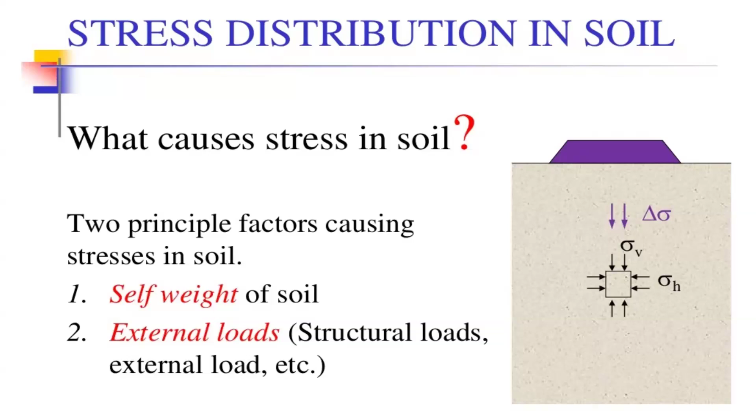Moving on, now let's think about the stresses due to self weight. When we think about a soil particle, there is a certain soil mass above this soil particle. Because of the soil mass above the soil particle, certain stresses can happen.

So the vertical geostatic stress at any depth - the geostatic stress means the weight of the soil above this depth. As a result, certain weight will be acting on this soil particle. So we call that geostatic stress. How do we calculate that?

That geostatic stress can be calculated by this simple formula: sigma is equal to gamma Z. Z is the depth from the ground level to the point we are considering, and gamma is the unit weight of soil. If you multiply the unit weight by the depth, you can calculate the vertical geostatic stress due to the self weight of the soil mass.

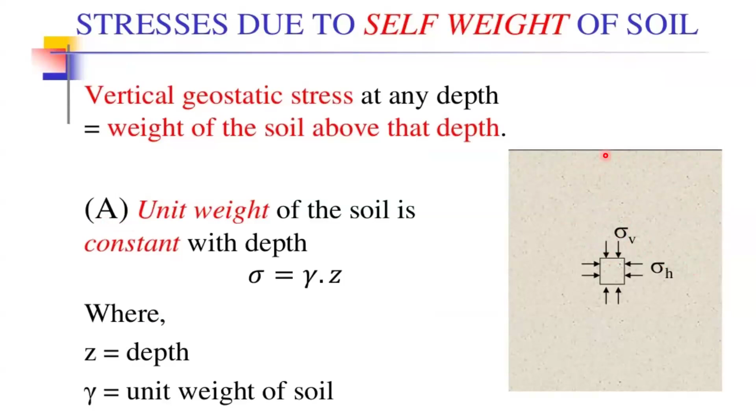In case number A, when we calculate sigma V, the vertical stress due to self weight, if the soil layer is not changing, it is very easy. You have a unique soil above the soil particle. The gamma will not change from here to here, so we multiply gamma into this depth to get the stress due to self weight. That is case number A.

In case number B, the problem is the soil properties vary from here to here. So we divide this soil into a very small depth. The depth of that small soil layer will be dz, right?

Within that dz, a very small depth, the soil properties will not be changed. So by assuming the soil properties don't change within that dz, gamma into dz is the weight of that small layer. You have to add each and every layer from here to here, that's why integration happens, from 0 to z, meaning 0 is here and z is here. You add each gamma dz value from here to here.

Case number C is the stratified soil, meaning layered soil. There we have certain layers, and within each layer the soil properties will not change.

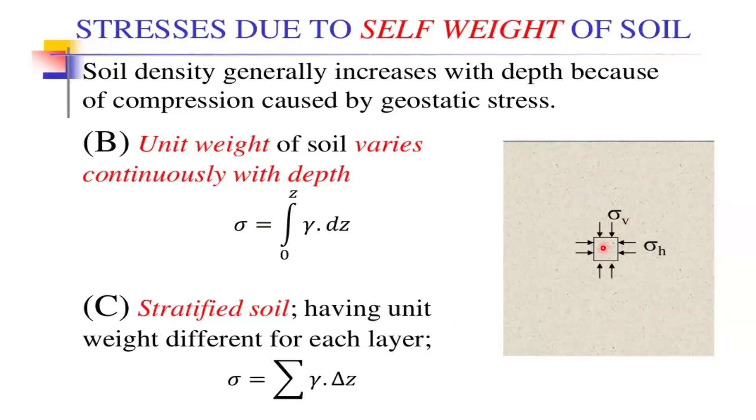Now we have a stratified soil layer. The point of interest is somewhere here at point X. This is the ground level. From this ground level, the first layer is sand and the second layer is clay, and the groundwater table will be there. The gamma value will be different here because it is dry sand, and here we have wet, saturated sand because the groundwater table is here. As a result the gamma values will be different here and here.

You have been given certain values: sand gamma D is 13.1 kilonewtons per cubic meter, sand gamma is 18 kilonewtons per cubic meter, and we have a clay layer here with clay gamma of 19.8 kilonewtons per cubic meter. So now there is a certain layered soil above this point X.

If somebody asks you to calculate the stress due to these soil layers, how do you calculate it? This is case number C, different soil layers are available. Here we have a dry sand layer, here a saturated sand layer, here a saturated clay layer. If you know the gamma values of each of these layers, you multiply gamma into depth so you can evaluate the stress coming to this position. Can you do it?

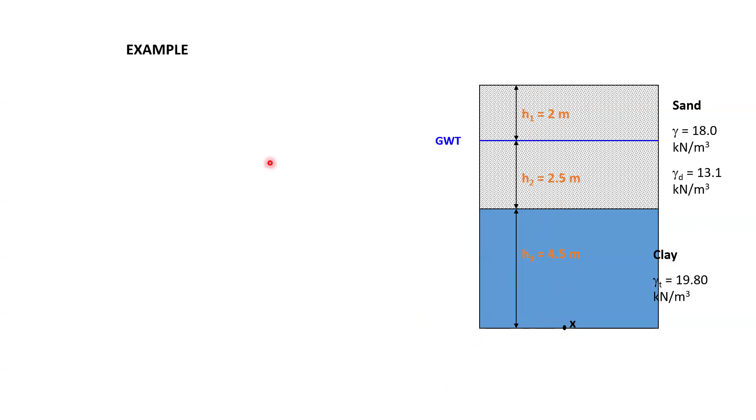And the clay, we have 19.8 into 4.5, so that you can get the stress over there. If you add all together, you get the final stress at point X. So this is the total stress: 13.1 into 2, 18 into 2.5, 19.8 into 4.5. So the total stress at this point is 160.3. That is the total stress.

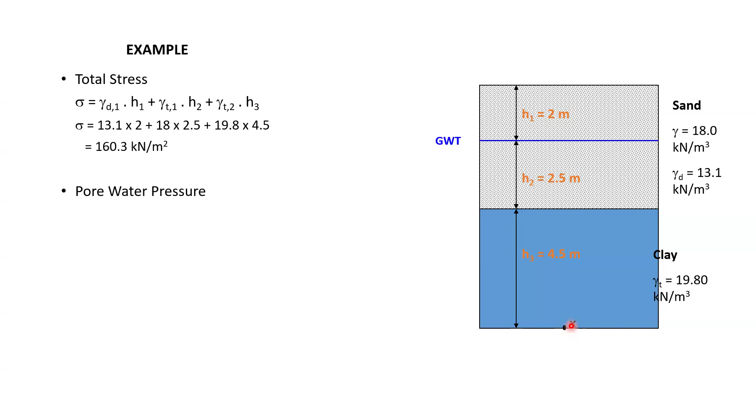Another thing is you cannot forget the pore water pressure, right? So the pore water pressure here, U, is equal to gamma W times H2 plus H3, because the water table will be here, so the water itself has certain additional stress up to here. So the height is 2.5 plus 4.5, altogether 7 meters, into 9.81. Instead of 9.81, I used 10 for my easiness. So U will be 70 kilonewtons per square meter.

Now you know the total stress, you know the pore water pressure. If you want to calculate the stress due to the soil, what would be the answer? The effective stress will be 90.3 kilonewtons per square meter. So some questions refer to total stress, some refer to effective stress, so you have to select what stress is to be used. So the self weight at this point due to the soil will be 90.3. Due to soil 90.3, the pore water will be 70, the total stress will be 160.3.

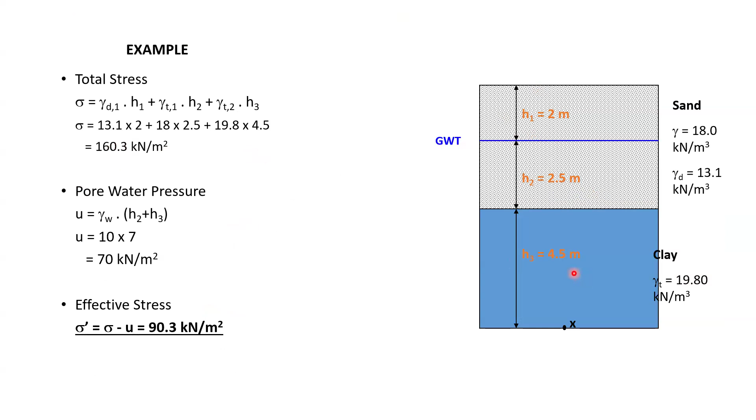Right, Ranmini, okay, now moving on to the next slide. Now I am going to cover a little additional things. Now, all these things actually we have discussed in your previous studies, not by me but by other lecturers, like some of you have completed your NDES, somebody NDT, somebody HND. So those things were there in your previous studies, this is just a kind of reminding session for you. Now from here onwards you should understand properly, because the questions in your exam paper will depend on this slide. So from this slide onward you will have to get a better knowledge and understanding. If you don't understand these matters, please let me know, I will clarify.

So now what we discussed so far is the stress due to the self-weight of the soil mass. Now we are going to discuss about the stress due to external structures or external loads. Once you create a certain foundation on top of soil, certain additional stress will be exerted in addition to the self-weight of the soil. So due to those structures, certain additional stresses will be exerted on the ground.

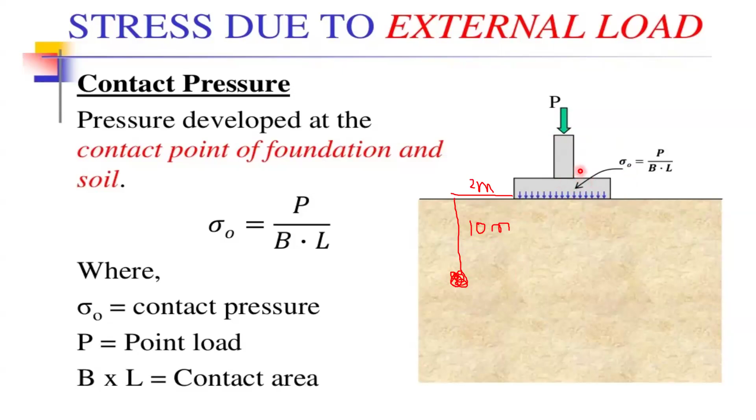Now we are going to discuss how to evaluate the stress other than this contact pressure due to this foundation. Stress distribution in soil with depth, what will happen? Now you know contact pressure will be somewhere here, this is the contacting area of this foundation. So that soil will be transmitted with certain additional stresses from this foundation from here onwards.

So how to determine the soil stress distribution with depth? There are two principles. First, when you go down, meaning when the depth increases from there, the stress impact will be reduced.

That means here you have contact pressure, which is the highest pressure. If you go 1 meter down, it will be lesser than this contact pressure. If you go 2 meters down, it will be more reduced. If you go 3 meters down, it will be more reduced. Likewise, if you go further down, there will be a point where your additional stress will not be much impacted.

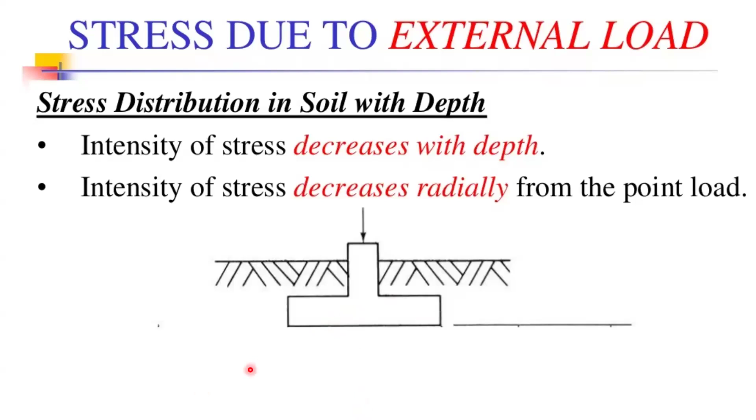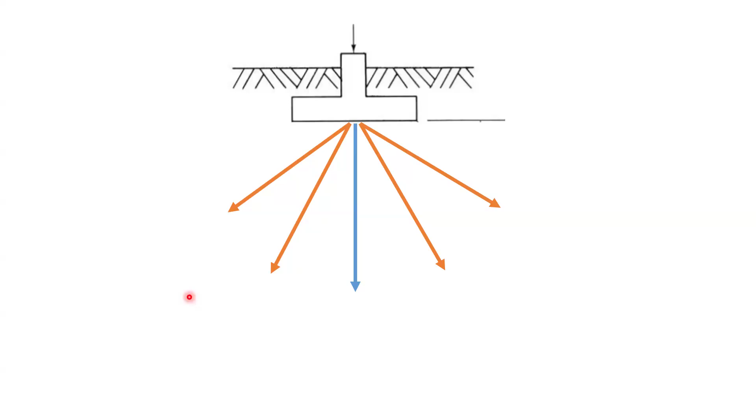I will show you, it is like this. Let's say there is a contact pressure of 200 kilonewtons per square meter. If you go down, it will be reduced to 160, 140, 120, likewise it will keep reducing. Now radially also, it will be reduced in the same way. Vertically it will be reducing, and radially also it will be reducing. With that principle, we have three different theories to evaluate how this stress distribution happens.

Due to the various external loads, how to evaluate this stress distribution within the soil mass? Let's say a point load Q is applied, and as a result, how will the stress be generated at the point considered in this position? So we have three theories for that.

First theory is the approximate method. Second theory is Boussinesq's theory. Third theory is Westergaard's theory. So we will be discussing all three in this class. Today I will try to complete at least the approximate theory and part of Boussinesq's theory, and tomorrow we will continue the balance part of it.

So that's my plan, I will try to complete up to Boussinesq's theory. Moving on with the approximate method, it is a kind of very simple method. We can use this theory for our problems in civil engineering, but the result is more conservative, it's more safe. If you go for Boussinesq's theory or Westergaard's theory, a kind of realistic value can be obtained, but if you go for the approximate method, a more safe value will be there.

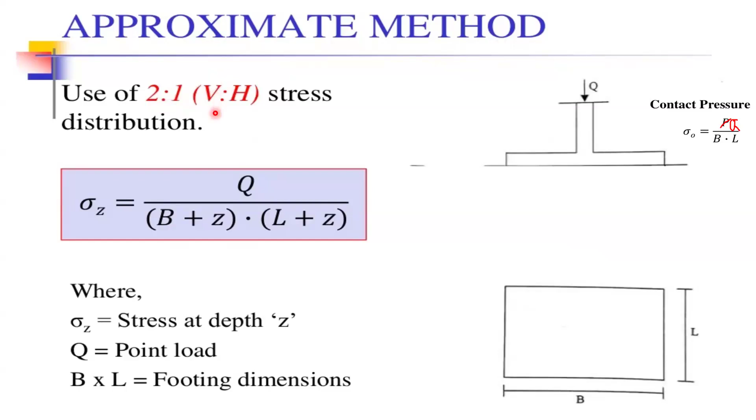How to evaluate? Now I said the approximate method, or else we can call it the 2-to-1 method. 2-to-1 method, right? Means vertically, if you go 2 meters down, horizontally the distribution will be 1 meter. I repeat, 2 vertical to 1 horizontal means if you go 2 steps down, distribution is 1 meter horizontally, right? So likewise, if you go Z meters down, horizontally what you have to do is go Z divided by 2.

Now if you go Z meters down, that means Z divided by 2 horizontal distance, in this direction you will have Z divided by 2 if there is a 2-to-1 stress distribution. In this other direction also the same happens, if you go Z meters down, here also it's divided by 2.

So in that situation, if somebody asks you to decide what is the stress over there, the point load will be capital Q. So capital Q will be Q naught into B into L. Here also the point load is the same, it will not be different. So Q naught into B into L would be the point load at this point, and also the point load at this point.

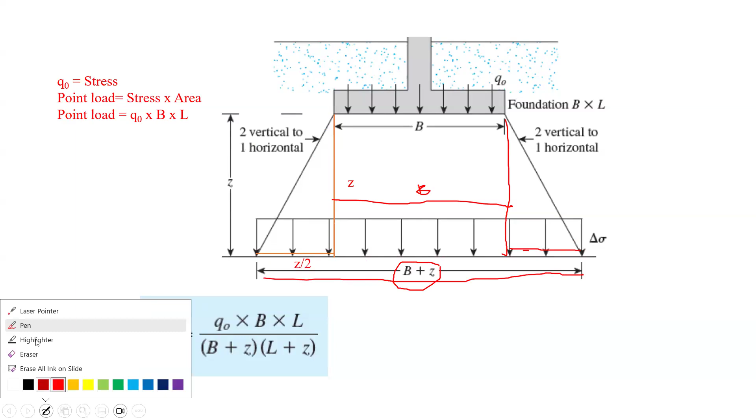Here with B, we have the horizontal distribution 2-to-1. If you go Z down, that means from here to here we have Z divided by 2. So Z divided by 2 plus Z divided by 2 plus B, it means B plus Z. So this is the B side.

How about the other side, the L side? It is similar. Here we have L, so in a similar way there will be stress distribution. There also we will be having L plus Z. Here we have L, here we have L plus Z.

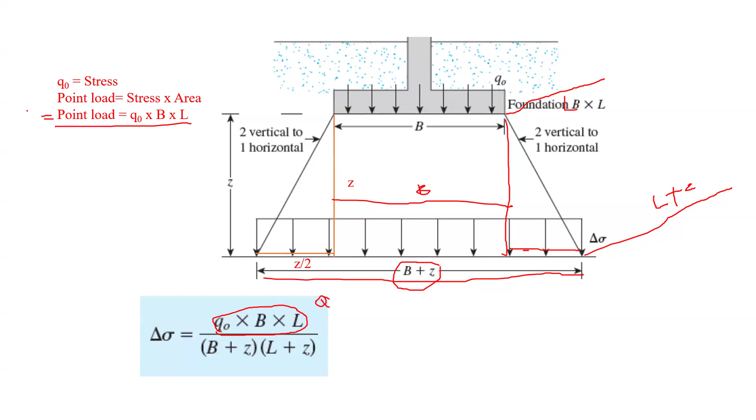So that's why this is actually a point load, don't worry about this, this is capital Q. Point load is Q naught, the contact pressure into B into L is the point load. That is equal to capital Q, which we discussed a short while ago. So this one is the point load.

So with this point load, we have B plus Z into L plus Z as the area, because the area here is B into L, but here we have a distributed area. The distributed area is B plus Z in this direction, L plus Z in this direction. So delta sigma is equal to Q divided by B plus Z into L plus Z.

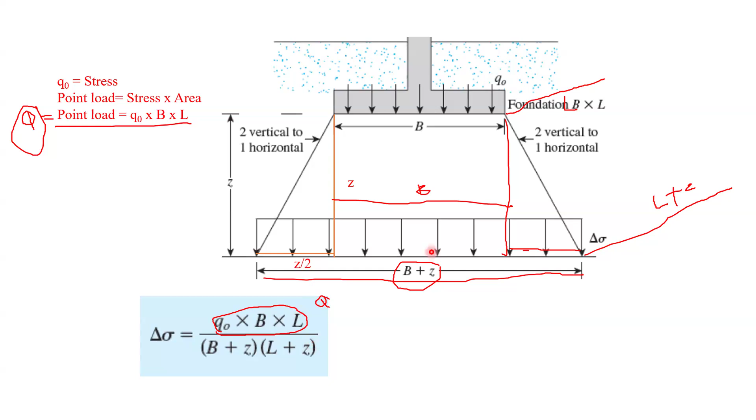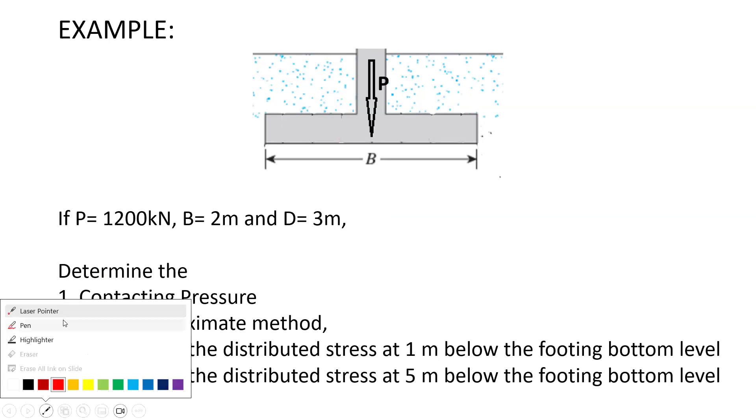Okay, now we have the first question, contact pressure. 1200 would be the point load. 1200 divided by the contacting area. Contacting area is 2 into 3, right? So the answer is 1200 divided by 6. So the contact pressure is 200 kilonewton per square meter. I hope everybody got that answer, right?

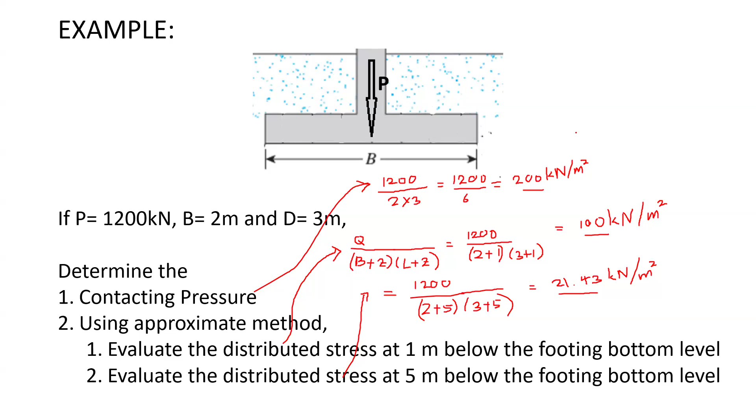Good, okay, so that's all for the approximate method. I hope everything is clear with you. Now, how about this one, you know already? The rectangular foundation you know already, and you know the formula, Q divided by B plus Z into L plus Z. The strip footing is something different.

Strip means the length is too much compared to the breadth. The length is too much. Think of a retaining wall, width is there around 600, 1 meter, sometimes 1.2 meters, likewise the width is there. But the length compared to the width, it's too much, it's really long. Think about kind of strip foundation, inverted T-type foundation or something like that. So there also we will be having the same principle.

So in this situation, what we will do is we will keep the length as a unit, right, so it will be a unit value, so that the stress will be calculated from this equation Q divided by B plus Z, and the length portion compared to this one, it is too much, so we will not consider that part. So the value will be kilonewton per square meter per meter. I repeat, the unit of this stress will be kilonewton per square meter per meter. The length will be given as per meter. Okay, this is kilonewton per square meter per meter, so that would be the value from this one. But here, kilonewton per square meter, no issue, per square meter.

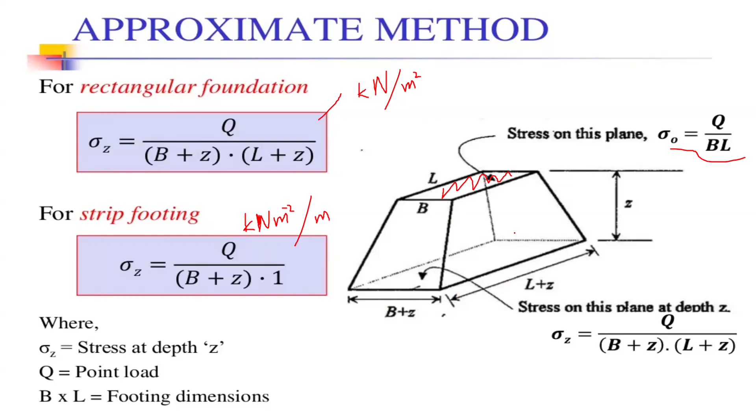The distributed pressure in this area - the distributed area is B plus Z into L plus Z. So the same Q will be applicable, and B plus Z and L plus Z is the additional area. Not only B plus Z, on the L side also the distribution is there, right? So this is a very informative diagram to illustrate the approximate method.

Okay, so that's all for the approximate method. I will show you an example. Let me show you - this is your past paper. I will show you an example.

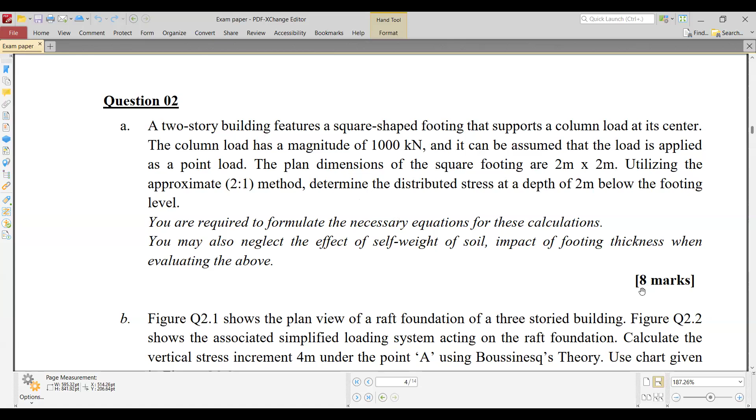You see, a two-story building features a square-shaped footing that supports a column load at its center. The column load has a magnitude of 1000 kilonewton, and it can be assumed that the load is applied as a point load. The plan dimensions of the square footing are 2 meter by 2 meter. Utilizing the approximate 2 to 1 method, determine the distributed stress at a depth of 2 meter below the footing level. If you understood this principle, you can earn 8 marks. So this is the question paper 2023, right?

And then, 2024, 2023, I had another batch. So that batch also I remember - I had another, let me see, 2023... so this is the question paper, sorry, 2022. So this is the question paper for 2022.

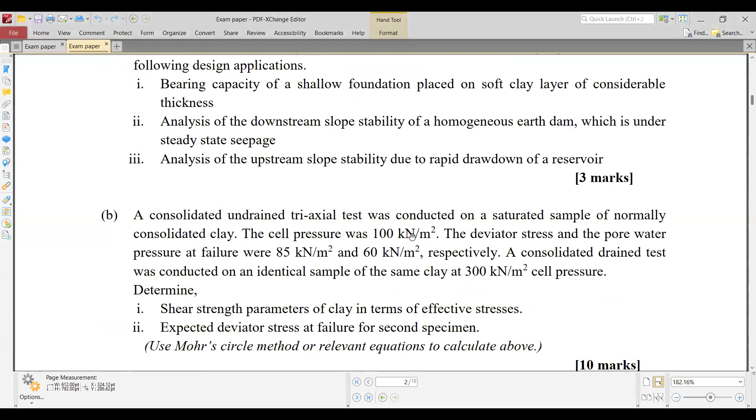Hope you can see. There are also, as I remember, I put one question on that area. A rectangular shaped footing of a three-story building carries a column load at its center. The magnitude of the column load is 2500 kilonewton, and it can be assumed as a point load acting on the center of the footing. The plan dimension of the rectangular footing is 2 meter into 2.5 meter. Using the approximate method, calculate the distributed stress at 2 meter below the footing level. You may develop required equations for the above calculation.

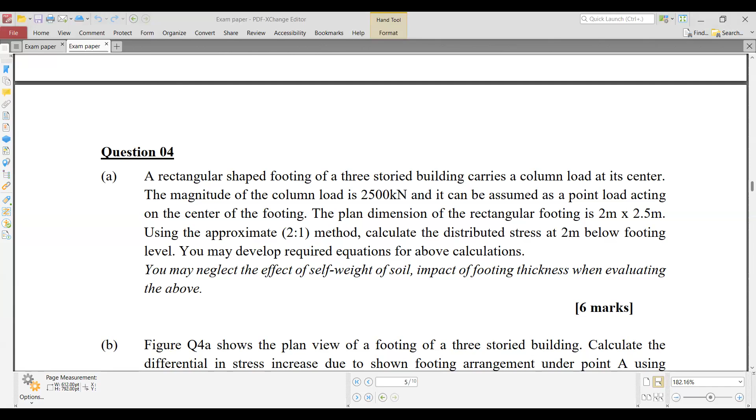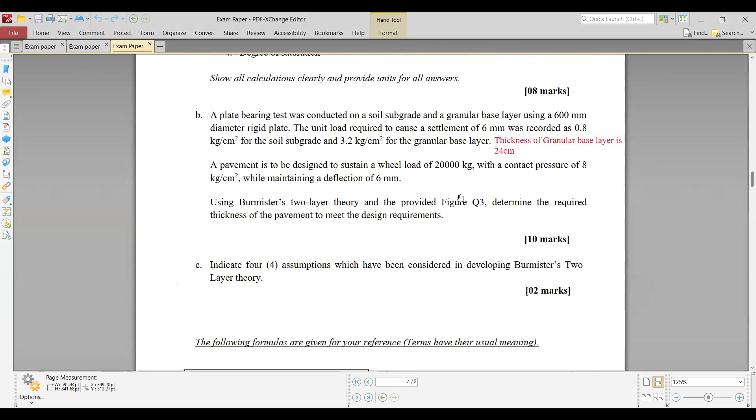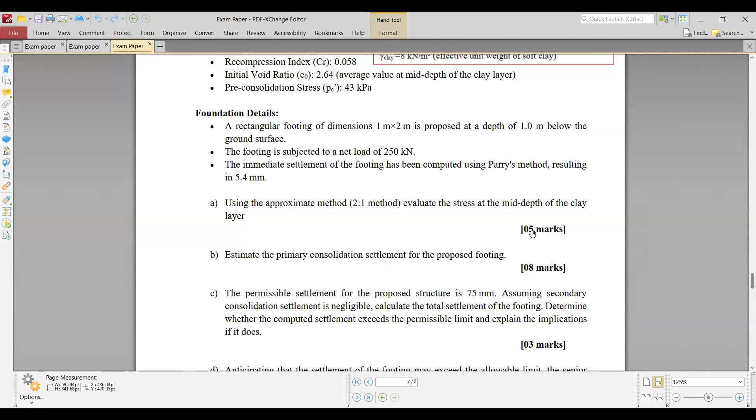So in your exam paper also, similar kind of questions can be expected, right? I will show you the 2024 one also - the previous batch exam paper. There also, as I remember, I put one question there... no, I didn't put any question. Here, using approximate 2 to 1 method, evaluate the stress at mid depth of the clay layer, 5 meter. Sorry, 5 marks are there.

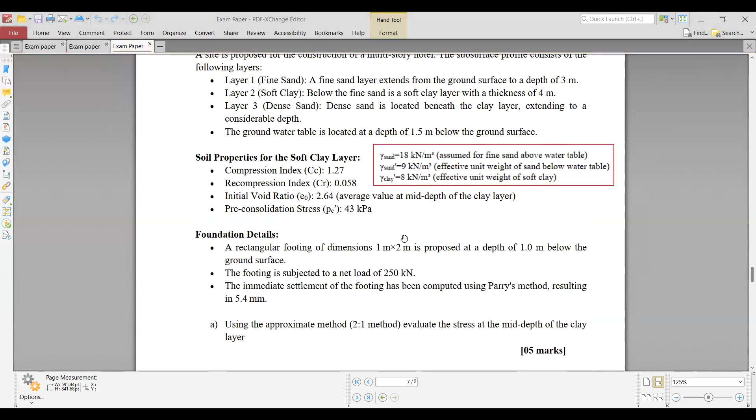So in each of the question papers, this approximate method will be used and you will be questioned, right? So it's really much important for you to understand that principle properly. So I covered that principle. Hope you got a certain knowledge so that you will be answering the question papers well, right?

So moving on to the Boussinesq theory, right? This is not like the approximate method - actually, approximate method is very straightforward, very simple. But Boussinesq theory is somewhat different. Different means there are few assumptions, and also derivation processes for the formula. The nice story here is I'm not going to give you the derivational part - no need to study that thing.

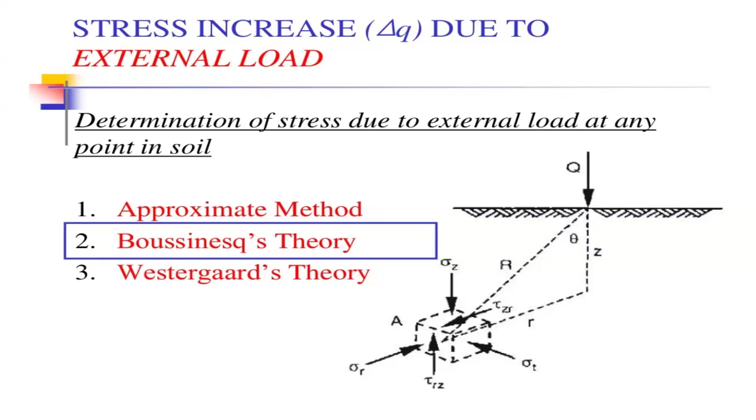You just need to know the equations. In the question paper, don't worry, I will give you all the equations. What you have to do is understand the principle and use it properly at the exam - plug correct values into the equations and get the final answer. That's what's expected from you. Okay, so these are the assumptions for Boussinesq theory.

Boussinesq, in 1885, solved the problem of stress due to certain external loads. External load is applied - you can see, right? Hope my presentation is visible to you. So what happens is an external Q load is applied - this is a point load. Boussinesq has solved this with the geometry and the application of the knowledge of stresses. He has solved this problem, and then he has made several assumptions during the derivational process.

So the assumptions are: the soil mass is elastic. Actually, as you know, soil is not an elastic material, but Boussinesq, in his derivation process, assumed the soil to be an elastic material, and also isotropic - that is another assumption - and homogeneous. Do you know the difference between isotropic and homogeneous? Do you know the difference between these three words: elastic, isotropic, and homogeneous?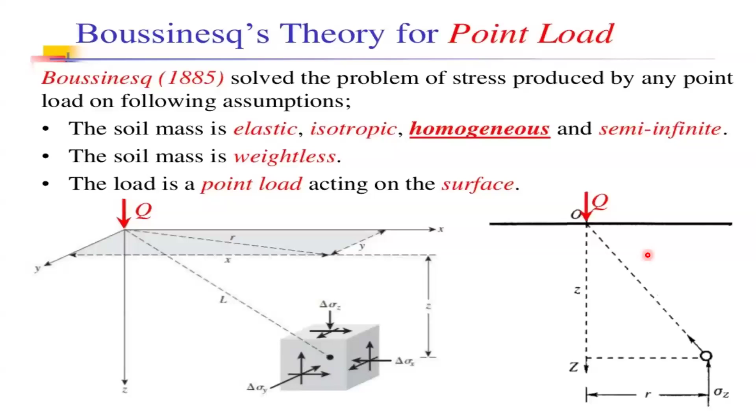So if you get a plane along this L dimension, that is there - this is the L dimension point. So what we have done was cut a plane along this surface and make this diagram. So that point load will be acting there, Z dimension down, you have R dimension horizontal, and the diagonal distance is L. With that understanding, let's move to the next slide for our formulae.

Now, Boussinesq's equation for point load will be like this: the Q point load is applied there, X dimension is horizontal distance, Y dimension along Y direction, and Z dimension - if you go down, you will meet your soil point there. And then what is the delta sigma Z due to this Q at this soil point? This is the delta sigma Z.

So if you want to calculate the delta sigma Z due to this point load Q, it will be 3Q Z cube divided by 2 pi L to the power of 5. I repeat, delta sigma Z is equal to 3Q Z cube divided by 2 pi L to the power 5.

Now, so I rearrange the terms, 3Q Z cube, no change. What is this L? L is the shortest 3D distance from this origin to this soil point.

So in other terms, what is R? R is the diagonal of this coordinate system, diagonal distance. From here to here we have X, from here to here we have Y. So if you know X and Y, you can evaluate R, using the Pythagorean theorem. So R is equal to square root of X square plus Y square. That is very clear.

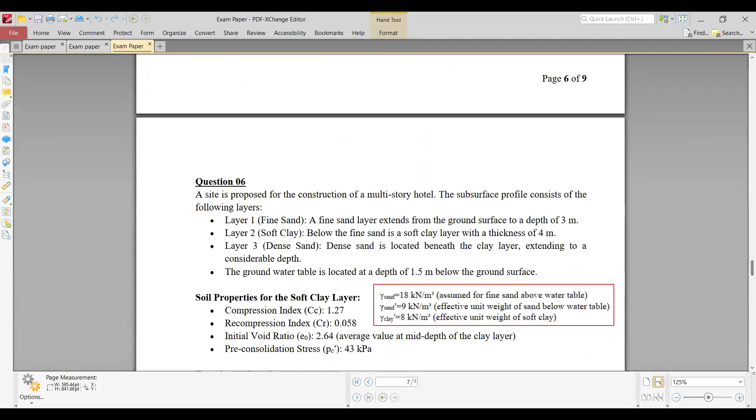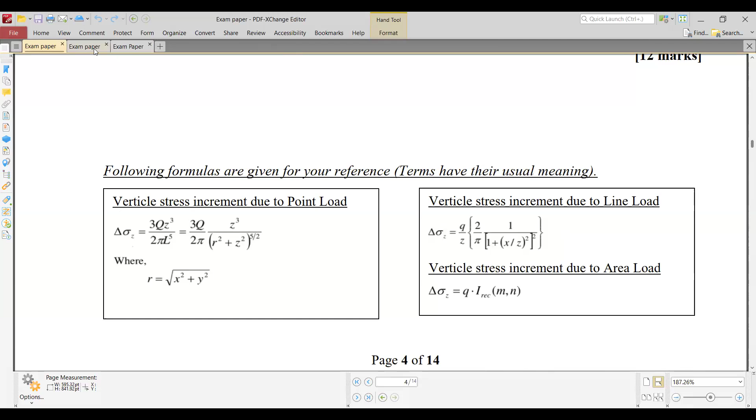I am not going to ask you any kind of derivations in your exam paper. Instead, what I will do is show you the exam paper standard which I am asking. So hope you can see the exam paper. Every time I ask about the Boussinesq equation or something like that, I give all the formula. Don't worry, this time also I will give you all the formula. No need to worry or remember all these derivational steps and the formula. You don't need to remind or remember all those things and write all those equations by your own in the exam paper.

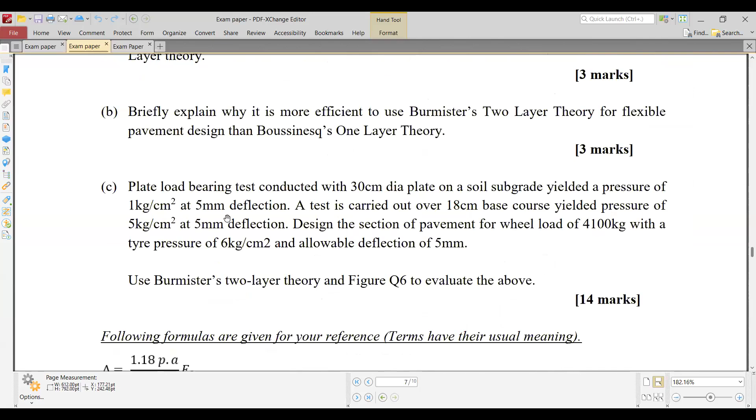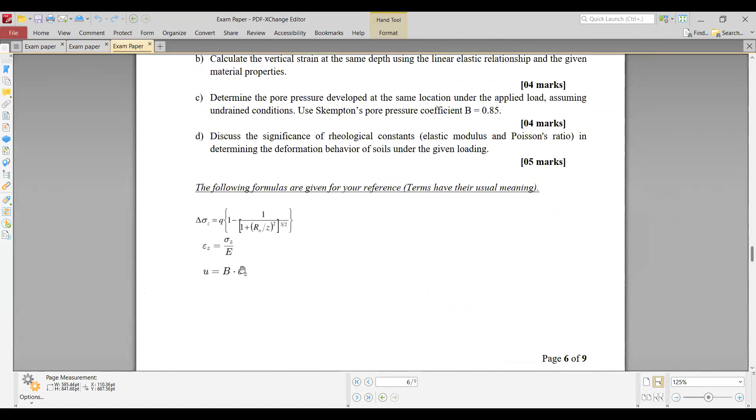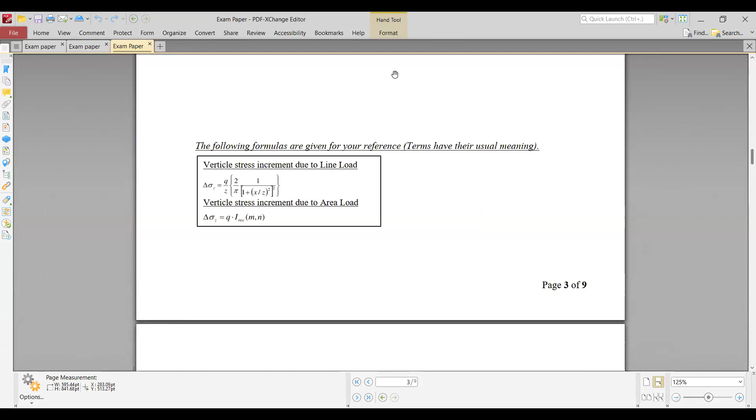All these equations will be there in the exam paper. What you have to do is calculate each and everything using this formula. You have to use the correct formula and plug the correct values given in the question and then answer correctly, that is what is expected from you. This is also a Boussinesq formula we will be discussing soon, for circular loaded areas, so Boussinesq theory. All the formula will be there in your exam paper, don't worry, so it is not much challenging then.

What I want to stress is I am not expecting you to remind or remember all those formula. What is expected from you is to know what sigma Z is, what Q is, what R is, what Z is, and how to apply this formula. So I am focusing on delta sigma Z only, not on delta sigma X or delta sigma Y. This is just for your information and knowledge only.

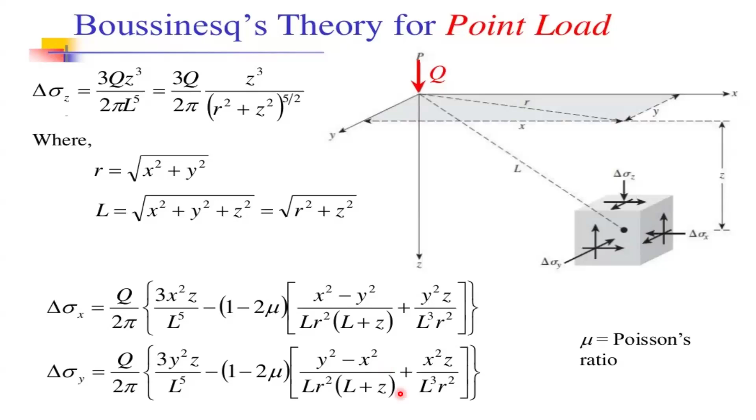So this is the formula we discussed a short while ago, right? This formula is rewritten as follows. The same formula I have rearranged and rewritten as below.

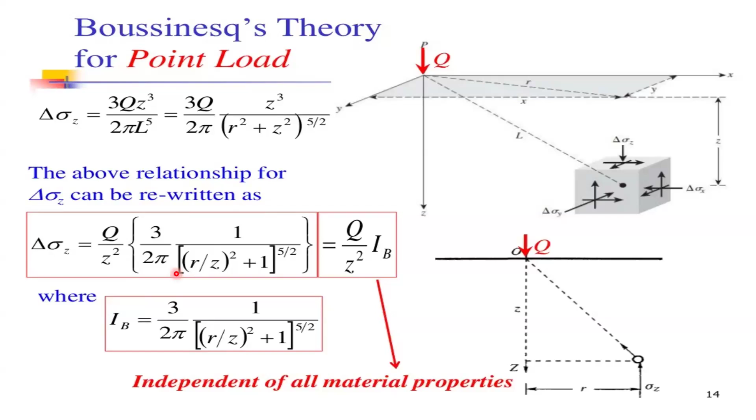So we say this one as a shape function. That's why we mention this as IB. So this IB value we can get as this part. The same part I have mentioned as IB, so that this equation is very simple now. Okay, so this is for point load.

So I have a problem here, a kind of very practicing problem, very easy problem, and the equation also given here. What you have to do is a concentrated load of 1000 kilonewton is applied at the ground surface. You have to calculate the vertical stress at a depth of 4 meters below the load, at a distance of 3 meters at the same depth.

So in the first question, directly under the point load, the depth is 4 meters. The other thing is, same depth means 4 meters down and 3 meters away. So with that understanding, try to evaluate the stress with these values.

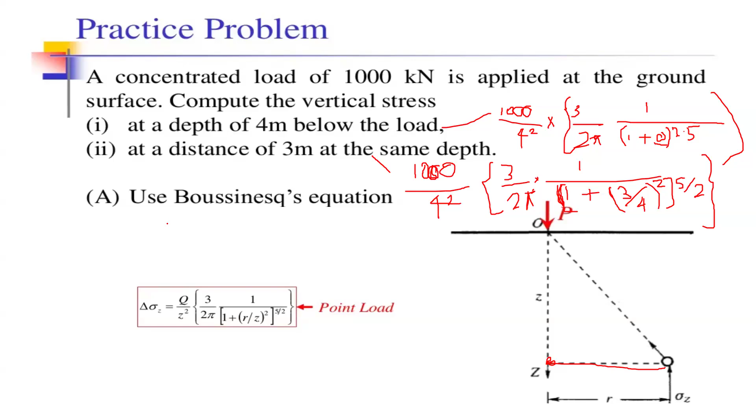Okay, so this is question number 1. Now with that, I hope you get a certain understanding of how to apply this formula and calculate the stress distribution due to the point load, right? So with that, we will move on to the line load.

Now, when we check the current situation of civil engineering, the nature of point loads is actually very rare. Compared to that, normally we are getting line loads, and sometimes mostly area loads. So the usage of point load and its associated formula is not much used in civil engineering. That's why the line load has been incorporated in Boussinesq's equation.

And Boussinesq's equation has been further developed to check the vertical stress increment due to the line load, right? So the line load, as you know, may be a retaining wall, a brick wall, a tie beam. Likewise, there can be certain line loads applied. So these line loads will carry a certain kind of load per meter, load per unit length, right?

So as a result of this line load, now we are going to check what is the stress induced at point A. When we check this line load, we have defined our 3D coordinate system at this line load. You see, now the x-axis has been defined perpendicular to this line load. Along this line load we have the y-axis, and under gravity, along the vertical axis, we will be having the z-axis. So the three axes are there.

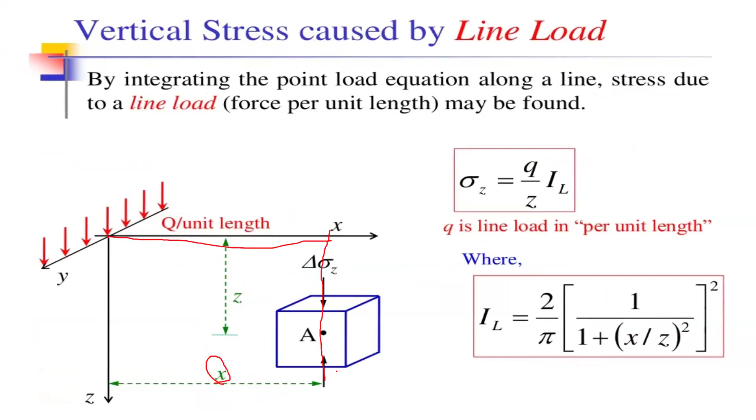So compared to the previous batch, I feel like the answers or responsiveness from this batch is a little less. Please improve that. Whenever I ask something, please give me answers. If you have any clarification, please let me know. The previous batch was a little bit better than this one because they were more responsive. There were several students who gave answers and calculated by themselves. Actually, they performed really well in the exam. Most of them got A pluses and A's, right? So it's really better to work with the lecturer.

So I request you to work with me and give me the answers, right? So then only you will understand how to apply. What is X? What is Z? What is Q? Likewise, then only you can understand what's the principle or what's the application of this formula, right? Okay, please calculate and give me the answer.

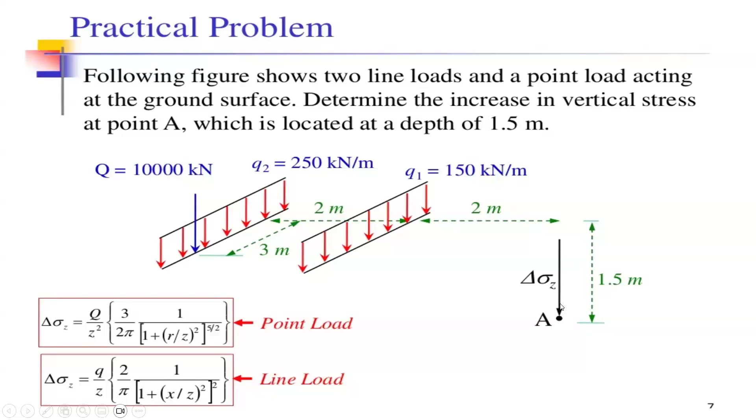So that finally you will get the combined vertical stress increment due to this loading system at point A. Okay, I'm not going to discuss this question because it is very similar to the previous example, right? So what we have discussed was the vertical stress increment for a given load using the Boussinesq equation. There we discussed the point load and the line load, right? For the point load we discussed a formula and its applications.

So I am at office for election. Sorry for the... right, right, Asha, you are there in election duty, no? It's fine, it's fine.

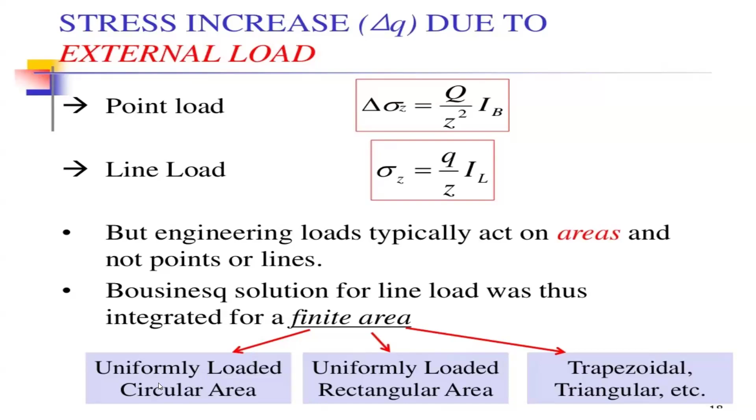Now, stress under uniformly loaded circular area. We are going to discuss about this part. As you see, some of the structures that we are creating, building, or constructing are of the circular area nature. For example, a circular type water tank.

Overhead water tanks are there, no? So if you are working with the water supply and drainage board, or if you are living in an area where water supply and drainage board projects are there, you see some types of water tanks. Hugely constructed elevated water tanks, all are in round shapes. So what happens is, as a result of these structures, the load will be exerted on the ground with a circular footing or circular foundation. So in such situations, we have to use this formula.

This is also an extension of Boussinesq's equation. Boussinesq developed his equation for point loads, but it has been further developed for line loads and this circular loaded area as well. So in case we have a circular foundation, we will have to use this formula.

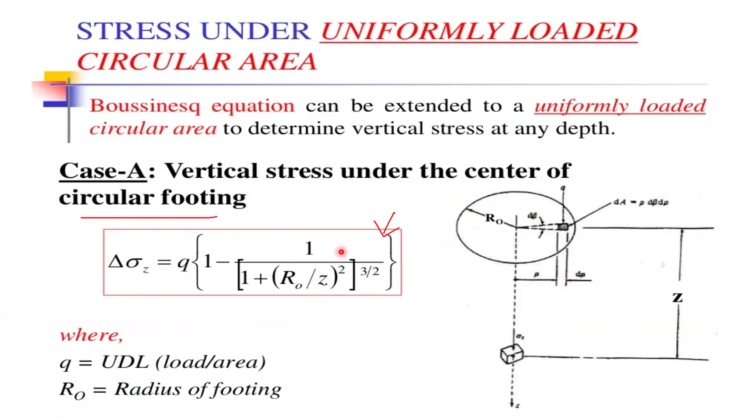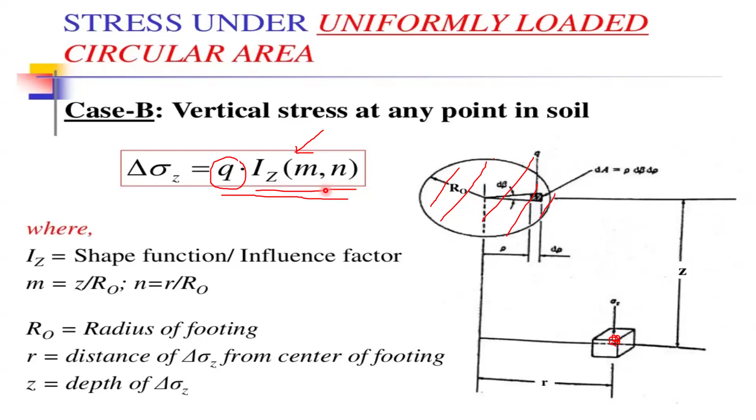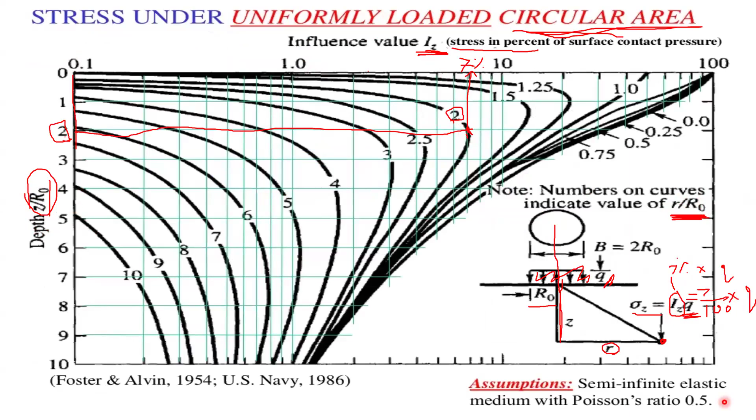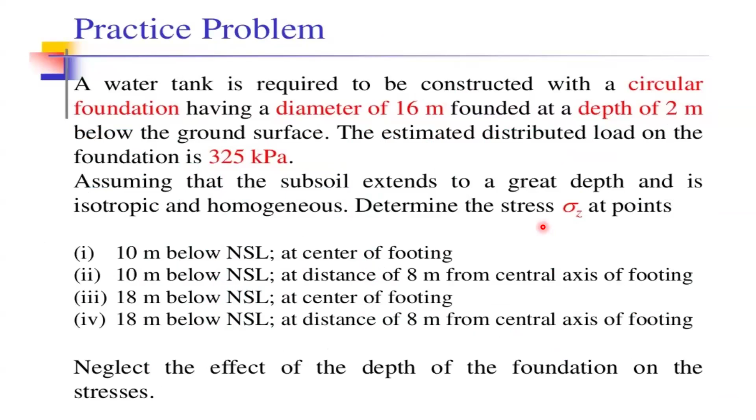Very easy. So this is a question for you. Kindly get a screenshot of this slide and try to work it on at office or as homework. Tomorrow when we meet, we will discuss this theory once again, and we will discuss this question. Ask your friends to join tomorrow, because this is a very interesting topic. Tomorrow we will discuss circular loaded area again, this question again, and then rectangular loaded area.

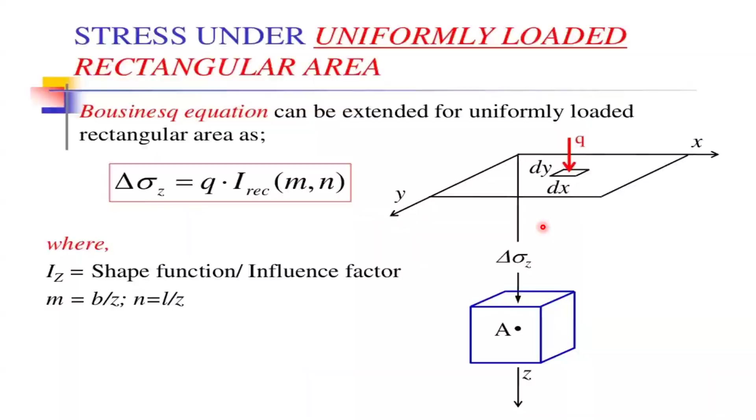So the new topic tomorrow will be rectangular loaded area. I am expecting to cover this rectangular loaded area slideshow, and hope you will understand these principles as well.

So now, what we discussed today was the stresses - certain stresses generating due to self-weight of soil material, and also due to several structures we make. First we discussed how to evaluate the stress due to the self-weight of soil material. Then we discussed the approximate method for external loads - various loading we create on the ground, and due to rectangular loading, what would be the vertical stress increment, calculated using the approximate method, the 2 to 1 method. Then we discussed the Boussinesq theory for point loads, line loads, and finally circular load.